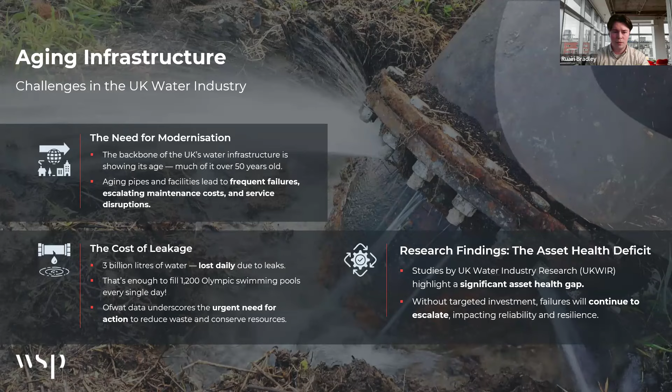So combined sewer overflows pose significant environmental challenges, discharging untreated sewage during heavy rainfall events. In 2024, there were approximately over 460,000 CSO spill events reported within the UK, which is around 1,250 per day. These spill events harm ecosystems and public health, underscoring the urgent need for proactive solutions.

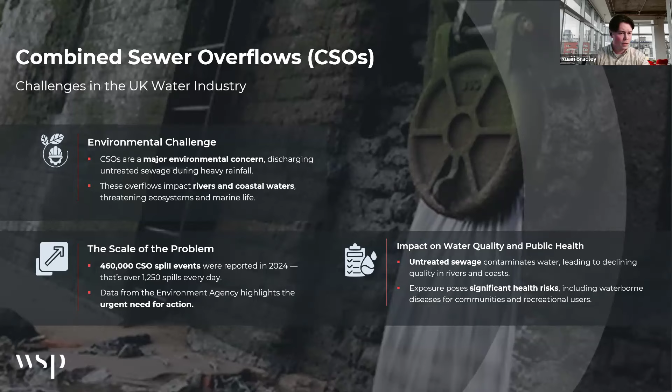So water pollution from industrial and agricultural sources also remains a major concern here in the UK. The Environment Agency enforces strict regulations such as the Water Framework Directive, aiming to improve water quality by 2027. Looking ahead, the next regulatory asset management period this year in 2025 will focus on achieving net zero targets while managing rising costs and maintaining compliance.

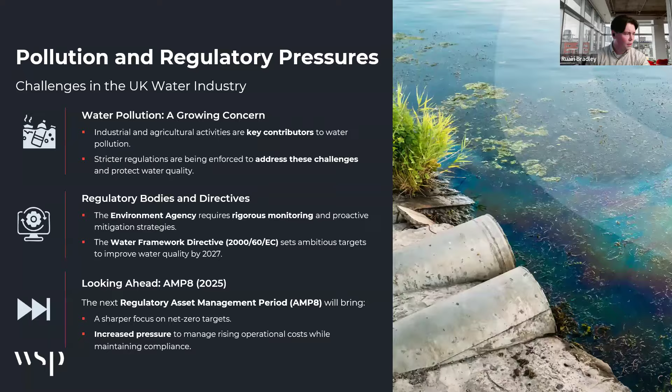So it's not all doom and gloom, however, because many of these challenges can be seen as opportunity for us as engineers. One way that this can be done is with the use and integration of data analytics and artificial intelligence. So an example of how this fits into our asset management is CENTAUR, which is an artificial intelligence of things driven system developed by WSP.

It integrates AI and real-time data and cyber-secure communications to optimize flow management and prevent flood events. It's been successfully deployed in Coimbra, Portugal, where it completely eliminated what was once a frequent flooding area at a World Heritage Site. And the key benefits of this include proactive flood management, the reduced need for costly infrastructure expansion, and ensuring compliance with environmental regulations.

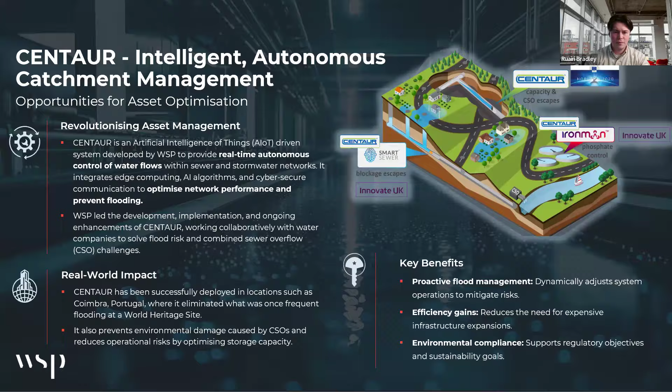And another example of where AI-driven software can be used to swing these challenges into opportunities is Aquadapt, an AI-driven energy optimization solution for water pumping stations, which is also implemented by WSP. Aquadapt integrates real-time telemetry, hydraulic models and AI to dynamically adjust pump operations and optimize energy usage.

When in use, this has resulted in an 8% annual reduction in pump costs and significantly lower carbon emissions for WSP clients such as Northumbrian Water. The main benefits of this include lower energy costs, reduced carbon footprints, and improved overall efficiency of the pumping system.

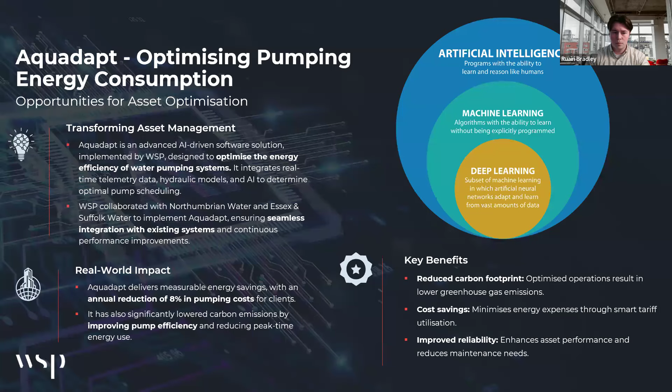As well as these two, WSP have also developed the Cardiff Resilience Modelling Framework in collaboration with Welsh Water and Optimatics to enhance water network resilience in Cardiff. This framework uses hydraulic simulations to predict failures and automate risk assessments. So far, over 10,000 simulations have been conducted, and they've helped to prevent service disruptions to approximately 360,000 people within this catchment area.

The key benefits of this include identifying high-risk areas, enhancing operational reliability, and enabling data-driven decision-making for future investment within the Cardiff area. Next slide, please, Paul.

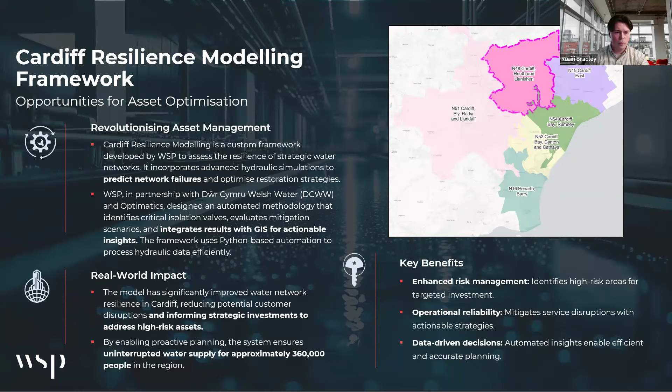So to prepare for the future, WSP are currently focusing on sustainable and resilient infrastructure. The next regulatory asset management period prioritises reducing the carbon footprint and protecting natural environments, ensuring long-term water sustainability. WSP initiatives such as the automated impact assessment of strategic pipe failures align directly with these goals.

By leveraging innovative technologies to optimize resource use and minimize disruptions, the Python and EPANET-based tool is used to assess pipe failures, automate valve identifications, and optimize restoration strategies. This supports the next regulatory asset management period's objectives by reducing unnecessary construction-related emissions and by improving the resilience of water infrastructure, demonstrating WSP's leadership in integrating sustainability into asset management strategies for future proofing.

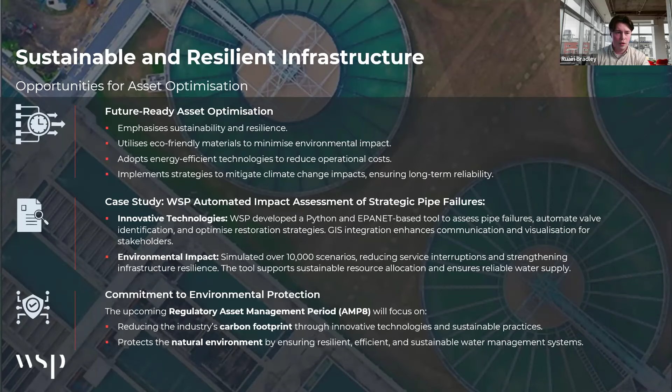So now that we've looked at the challenges and explored some current opportunities in asset optimization, let's shift our focus to how a future-ready approach can address these issues. A future-ready approach balances efficiency with sustainability on the operational side. Advanced technologies streamline processes and reduce energy consumption with lower costs. This results in better service delivery for customers.

From an environmental perspective, innovative solutions help monitor and manage CSOs, reducing their impact. These approaches ensure compliance with regulations and support the long-term sustainability of water resources.

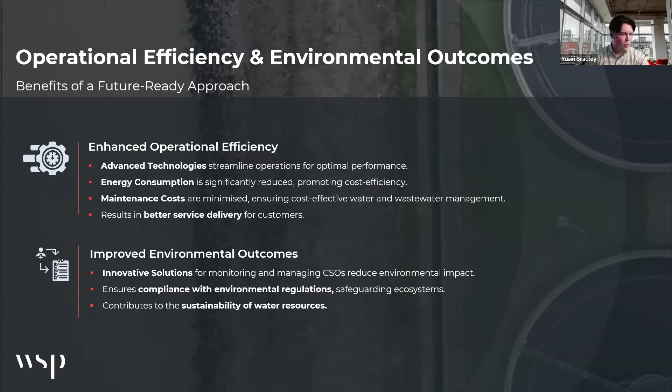Is that on? Sorry, there's a bit of a lag on my side. Is that on? Yep, perfect.

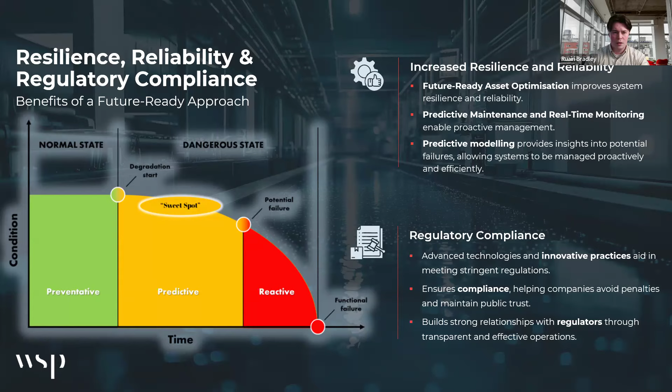So to conclude, I want to recap the key themes we've discussed today. We've explored how building resilient infrastructure and securing the future of water supply are vital to addressing the challenges in the UK water industry. By embracing advanced technologies and improving operational efficiency, we can drive meaningful change right across the sector. It's clear that the solutions we implement today will shape the sustainability and reliability of water infrastructure for generations to come.

As Peter Drucker once said, the best way to predict the future is to create it. I think this quote perfectly encapsulates the proactive approach that we need to be taking within this sector to ensure the future of water management.

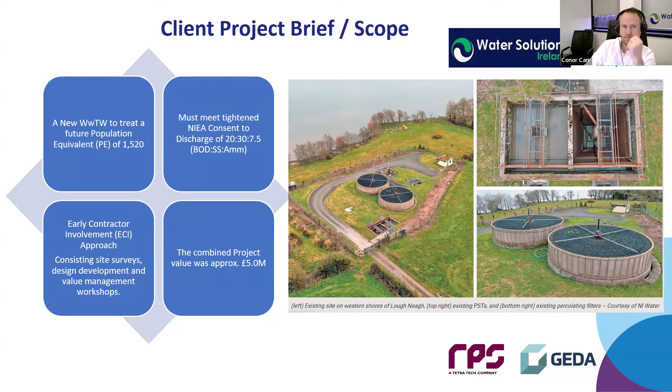The project timeline then: here we can see that in February 2021, the early contractor process commenced. 18 months later, we were on site in August 2022. In 2023, we completed phase 1 and phase 2 of the project. During these phases, we were reusing most of the existing assets during construction to maintain site compliance.

Last year in 2024, we completed phases 3 and 4 of the project. It's during these phases that we gradually phased out the existing assets and commissioned all the new plant and equipment associated with the new treatment works, handing over to NI Water last November in 2024.

The key processes and elements of the sustainable solution. First, we had the ECI process. This allowed early collaboration with NI Water and our supply chain for design outputs and workshops such as HAZOP, value and risk management, and ultimately leading to a sustainable turnkey design and build solution.

This crucial period in our Ballyronan journey allowed us the time to forward think our approach and help shape the early stages of the project, which set the tone for its overall success. Developing the turnkey design and build solution, undertaking extensive optioneering to ensure the best solution, a phased construction approach to reuse existing assets during construction was ultimately agreed.

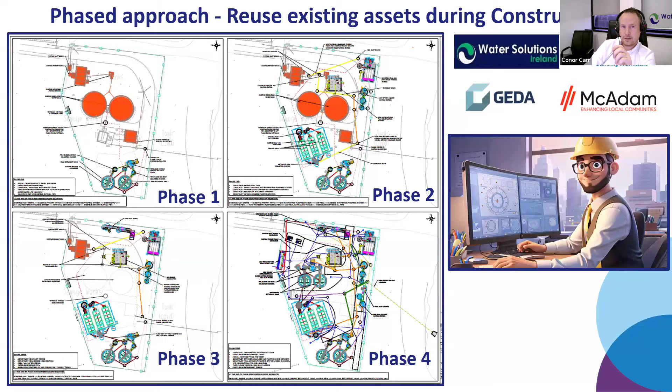A crucial aspect for the existing assets to remain in service whilst constructing the new works was to ensure that the existing assets were fully operated and maintained during this period to safeguard compliance. It was imperative to provide safe access and egress for NI Water operational staff. This included statutory bodies such as the NIEA for monthly sampling.

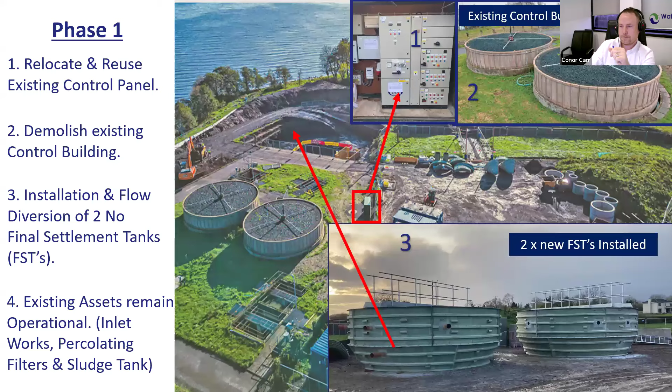Next slide, please, Paul.

This meant when the RBCs were delivered to site, it was a drop-in, pipe up, and backfill method of installation, very straightforward. Other advantages are low operating costs, reduced noise, and odorless operation. This phase also included the construction of the new interstage pumping station and storm storage tank.

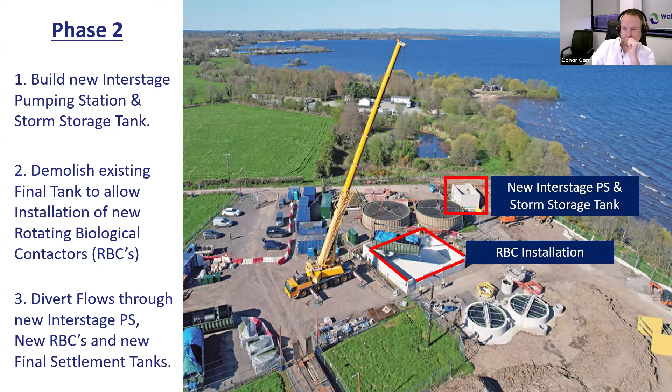Next slide, please, Paul.

The benefits of existing equipment already in place should always be explored by taking a holistic approach when assessing electromechanical systems within the water industry. Thoughtful appraisals of existing assets will determine their future, will determine their purpose, either permanently or temporarily. If implemented properly, they can add significant value to our projects, reducing costs, carbon, disruption, along with environmental and sustainable benefits that come with reusing or repurposing existing assets.

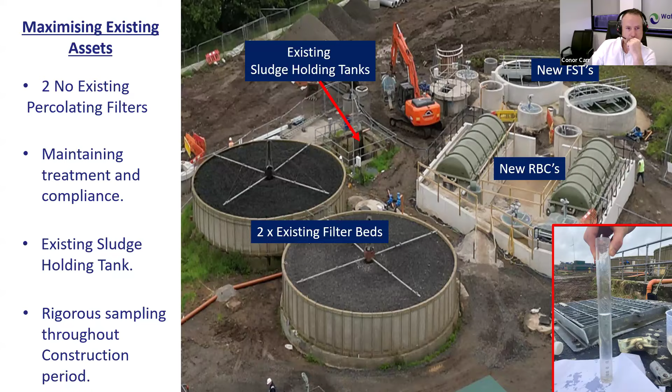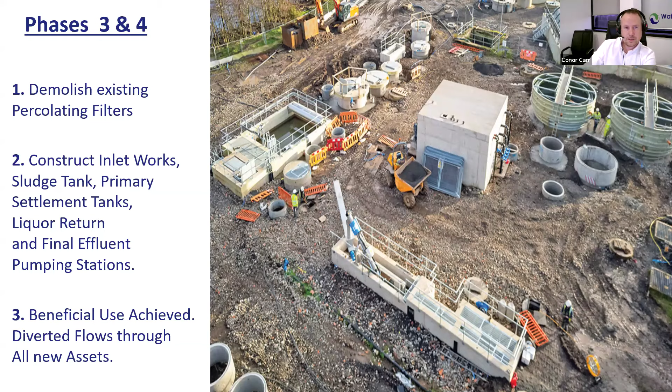It is also important that we can measure success, as it provides governing bodies and the public with a noticeable measure of success and gives them confidence in the work we are doing. Our successes that we have highlighted in our presentation today have been possible through learning and building on the works that have gone before, and it is in this interaction between traditional methods and innovative new processes that we hope to continue this work into the future.

For those of you that don't know, there was a Lough Neagh report, an action plan published by the Northern Ireland Executive in July last year. It's good to know that Lough Neagh is a key priority for the Executive moving forward. Copies of this document can be obtained from the link within the chat, or alternatively it is available online.

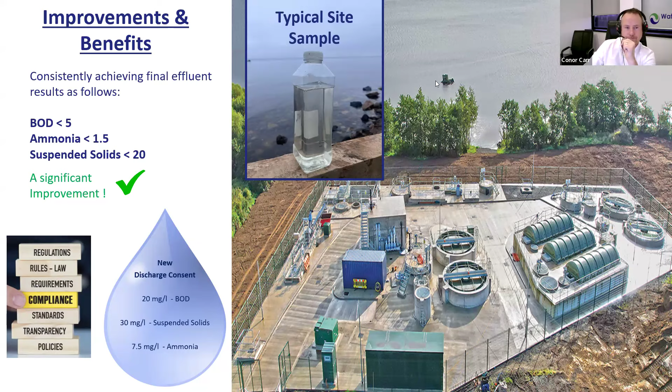Move to conclusions. Paul, thank you. So being more efficient by maximising existing assets during construction helps to prioritise future capital expenditure that will yield the greatest added value for the consumer. Whilst the existing works was operational but not optimal, through implementing alternative, proven and innovative engineering solutions, we can achieve a modern wastewater treatment works, helping to protect our public and environmental health.

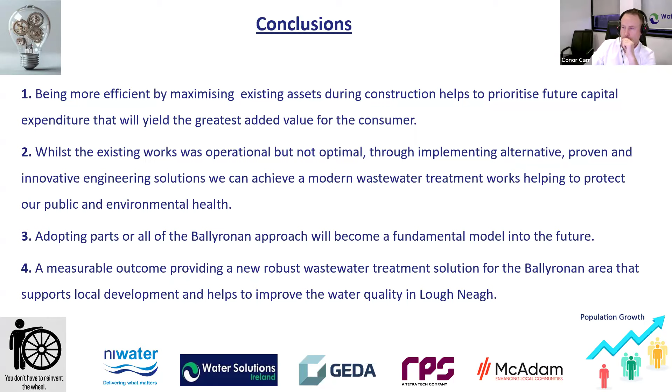Adopting parts or all of the Ballyronan approach will become a fundamental model into the future. Ballyronan is a measurable outcome, providing a new, robust wastewater treatment solution for the Ballyronan area that supports local development and helps to improve the water quality in Lough Neagh. Thank you, folks.

Thank you very much, Conor, for another great presentation on a live job, it's handy to see what you've done. So it's very much appreciated. So we'll move into the Q&A session here, and we'll just start by opening up the Q&A.

So the first question here, I think this is maybe towards Rory, is how is data collected and analysed to enhance optimization and performance of water assets? I'm going to pass this one over to Kieran here, Paul, just because he'd probably give you a more in-depth answer than I'd be able to provide you with.

Perfect. Thank you. I'll try to do that one. Everyone hear me okay? I'm not sure. Hopefully the noise behind me isn't too bad.

I guess we collect data at every stage of the project life cycle or the asset life cycle.

So when we start designing it, we're developing BIM models, so you kind of get your engineering twin. Once we get into the operational stage, you have all the kind of sensors that are deployed. So you might have fixed sensors like flow meters, IoT devices, a lot more chat about digital twins and how we can integrate that kind of fast data into models.

You've got your customer, all the different corporate data as well. So you might have customer performance information, things come back from that, and other systems like repair and maintenance history. So all that gets integrated into the melting pot or into the data lake, or whatever we want to call it, where all the data is gathered.